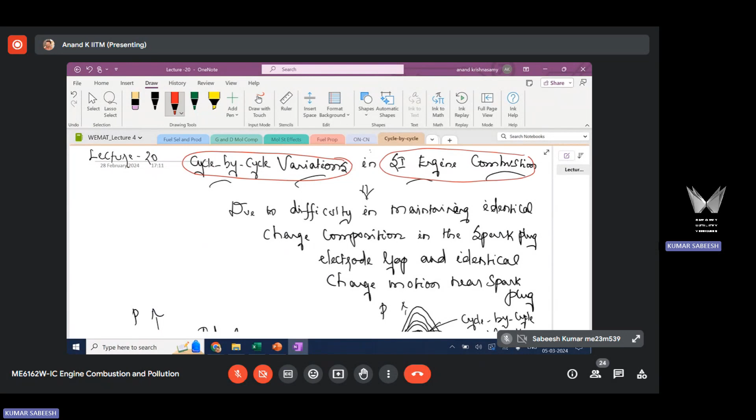What I mean by cycle combustion variation is, if you look at this pressure crank angle diagram, I have given two diagrams. One on the left is an ideal pressure crank angle diagram, ideal from the perspective of no cycle by cycle variation. You see only one profile. This pressure profile is drawn for n number of cycles. By cycle here I mean one engine operating cycle.

In a 4-stroke engine, one operating cycle includes 4 strokes. What are the processes involved? Suction, compression, power and expansion stroke, and then exhaust. So there is intake, compression, followed by expansion, then exhaust. Everything put together is one operating cycle for a 4-stroke engine.

So the engine executes n number of operating cycles. What decides the number of cycles in a given time t? RPM, sir — engine RPM. Engine running speed decides the number of cycles executed in a given time. When the engine runs at high RPM, you execute more cycles per unit time.

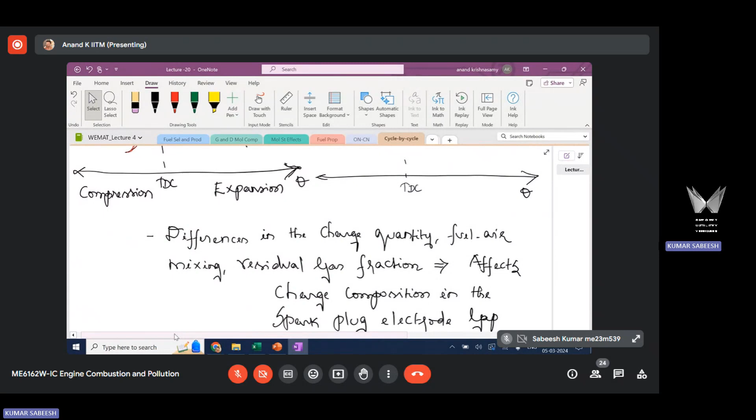As compared to CI engine. In CI engine, it's not a flame propagation based combustion event - we will discuss this in the next topic. Since it is not flame propagation based, you don't have this problem.

The differences in charge quantity, fuel air mixing, and residual gas fraction affect the composition of the charge in the spark plug electrode gap - this is the primary reason. Second, fluid motion near the spark plug also affects heat loss, and thereby the flame development time varies from one cycle to another.

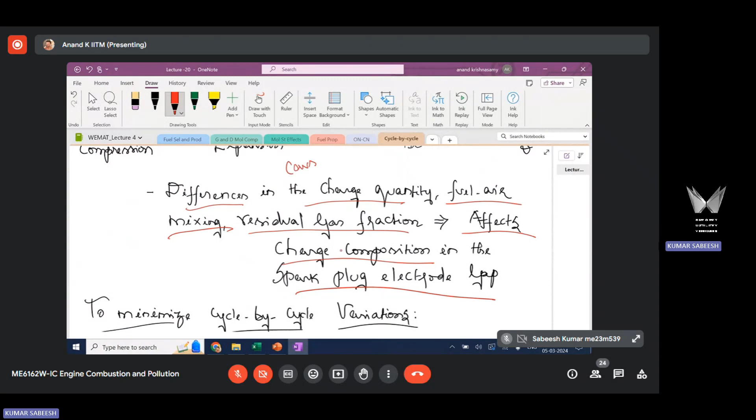Exactly, so this is one of the most important effects - there will be power loss. Large cycle by cycle variation leads to power loss in SI engine. This is one of the detrimental effects on the SI engine due to cycle by cycle variation. So you will have a power loss, as you can see from the pressure profile.

So you see the slope. This cycle is a fast burn cycle - you see that the slope is very steep, this cycle burns quickly, it's a fast burn cycle. Now look at this cycle's slope - it's a slow burn, right? The slope is flat, it's a slow burn cycle. So you have a large variation in the profile - some cycles are fast burn, some are slow burn.

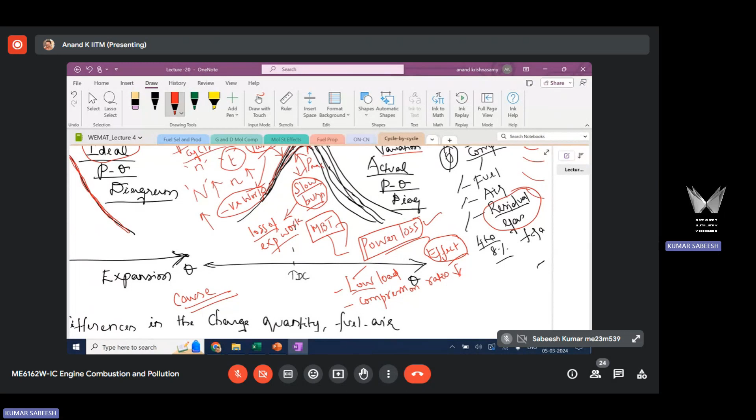Also when the compression ratio is less, at low load and low compression ratio, the cyclic variation will be very high. Because at low load, there will be dilution of the fresh charge due to reverse flow of exhaust gas. If you recollect the phenomena happening during valve overlap period at low load or part load condition, there will be reverse flow of exhaust gas into the intake system, diluting the fresh charge. Any dilution of the fresh charge increases the residual gas fraction, and higher residual gas fraction leads to composition variation at the spark plug location. So at low load, the variability is high because the dilution is very high at this condition.

Compression ratio also affects residual gas fraction, as we already discussed. Higher compression leads to higher expansion and less residual gas. But with lower compression, the opposite effect occurs - you will have more residual gas, thereby causing larger cyclic by cycle combustion variation. So this effect is more prominent at low load and low compression ratio.

Now what is the solution for this? How do we address this? This cannot be avoided - you cannot completely eliminate cyclic variation. This is unavoidable. But what we can do is minimize this and try to approach the ideal case. What should we do to minimize this?

So increase the mixture - inject a little more fuel, make it richer a bit, to create a high temperature condition.

Higher inertia - inertia of the mechanical system. How does that help? It will reduce the variations, sir, because of combustion. I'm trying to understand why you say variation in inertia of the mechanical system reduces variability.

This has to do with the process - how the system level inertia affects this process. I think he's trying to correlate it with the speed at which the components will move. Okay, speed will definitely have some effect. Fine, anything else?

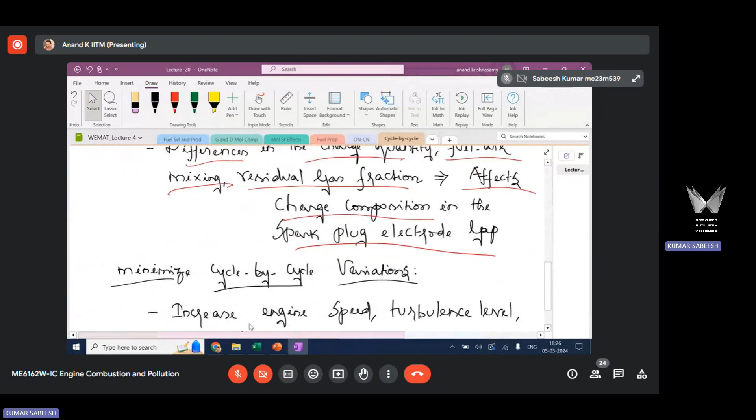Sir, instead of single spark, like going digital, DTSI, twin spark and all - spark plug location and the number of spark plugs used will play a role. So these are various countermeasures - you can go with dual spark plug. You can see in some motorcycles dual spark plugs are used. Bajaj extensively uses this. This dual spark plug will reduce the variability because the flame...

Increase the engine speed - any increase in engine speed will enhance the fuel-air mixing and flame propagation speed, and this reduces the cycle by cycle variability. Turbulence level also plays a role - increase turbulence by suitably shaping the combustion chamber. Earlier we discussed how we can create turbulence during intake and compression stroke. By suitably designing the combustion chamber, you can increase turbulence level and flame speed, which reduces the combustion variability.

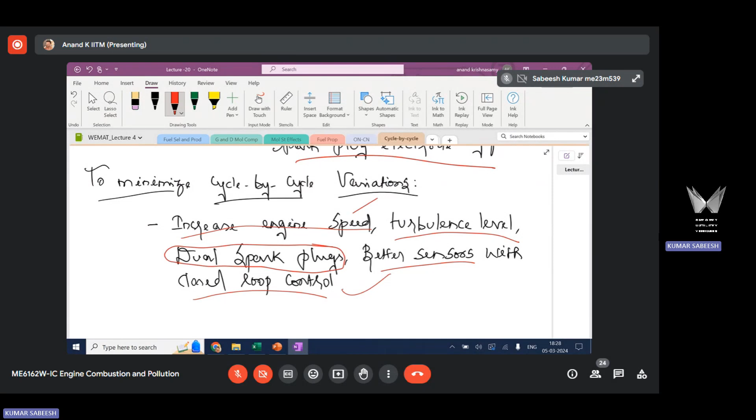If you have a better sensor with closed loop control, you can monitor the cycle-by-cycle variation, and if there is a large variation, you can send the appropriate signal to take countermeasures to minimize the power loss from the SI engine. Otherwise, there will be a large power loss because of this cyclic variation. It's unavoidable, but it can be minimized by properly monitoring with the help of an effective engine control system.

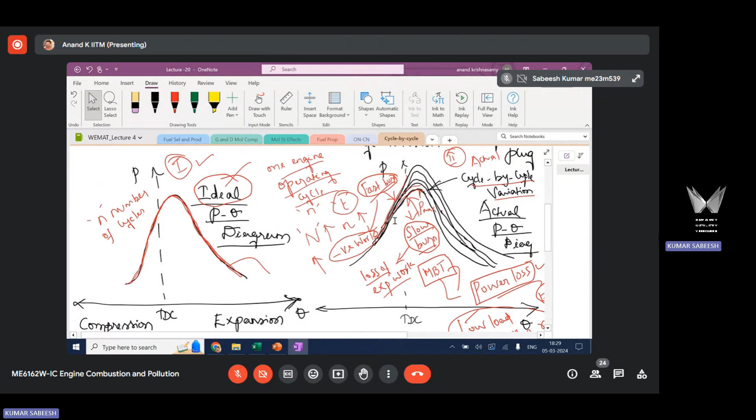Sir, I have a doubt. You had told that turbulence level in the engine is detrimental for the flame development phase, whereas it is very advantageous for flame propagation.

So if we are having cycle-to-cycle variation, and we just discussed that if we increase the turbulence level it will probably help, but you also told it will depend on both flame development and flame propagation. So once turbulence level is increased, flame development will have a detrimental effect on that. So how is it going to help? How is the net gain?

You recollect whatever I said earlier about engine parameter optimization - you always have a trade-off. There will be a positive effect, there will be a negative effect. When I say increase or decrease, take it in the sense that it should be optimal, not too low, not too high. Too high will lead to power loss also due to heat loss - very high turbulence level will considerably increase the heat loss, and there will be associated power loss. That is a different phenomenon from what we are discussing here. But in terms of the effect of turbulence, there are positive effects and negative effects.

What is the positive effect? It will help create uniform fuel-air mixing, and it will help enhance the flame propagation speed. So the variability in the second stage will be considerably reduced, and it is dependent on the variability in the flame development time. Because of higher turbulence, any change in turbulence will affect the heat loss, so you need to ensure the heat loss is not too high because of the turbulence.

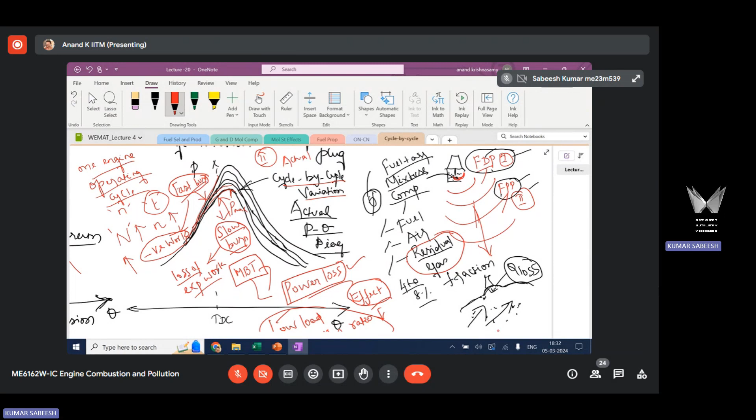Sir, I have one doubt. If we increase the amount of charge, amount of spark - generally it will go towards a fast burning process, right sir? Amount of spark in the sense, what do you mean by amount of spark? Like, we are giving spark energy, so if we increase that energy - talking about spark intensity. Yeah, correct sir. So spark intensity, then it will go towards a fast burning process?

No, spark intensity has nothing to do with burn rate. The spark is discharged only in nanoseconds.

I've given some typical numbers. At the time of spark discharge, it's a few nanoseconds - that is the time scale. So spark discharge is done only at that nanosecond time scale, just to initiate the ignition. That has nothing to do with the development of flame or the time taken for forming a stable flame. You are just initiating it; that has nothing to do with burn rate.

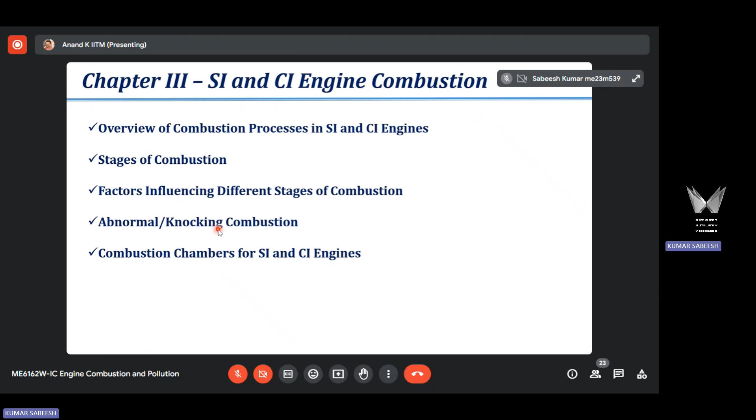Abnormal combustion is also referred to as knocking combustion. We will discuss the mechanism involved in forming this knocking combustion so that we can avoid it. Understanding the principle behind knocking combustion is important from the perspective of avoiding it in SI engines. We are going to discuss the mechanism involved, the effects of knocking combustion, and what factors we can utilize to avoid it.

As said, knocking is an undesirable phenomenon. The basic principle behind abnormal or knocking combustion is self-ignition. What we want in a normal SI engine combustion is: you discharge an electric spark, initiate flame formation, the flame should be stable, this flame should move across the combustion chamber and ignite the mixture. This is the normal, smooth combustion that happens in an SI engine - unless there is self-ignition or auto-ignition.

Self-ignition is a kind of ignition that happens only in a CI engine. In a CI engine, the combustion event starts only with self-ignition because you are not using a spark plug as we do in the SI engine - ignition is not with external aid, rather it's self-ignition. That process is normal in a CI engine, but it's an abnormal process in an SI engine. We should not have self-ignition.

Once the self-ignition of the charge, fuel, or mixture happens, it leads to this knocking or abnormal combustion. So knocking combustion happens due to self-ignition of end gas. I've used the term end gas - end gas refers to the charge, and charge here refers to fuel plus air put together.

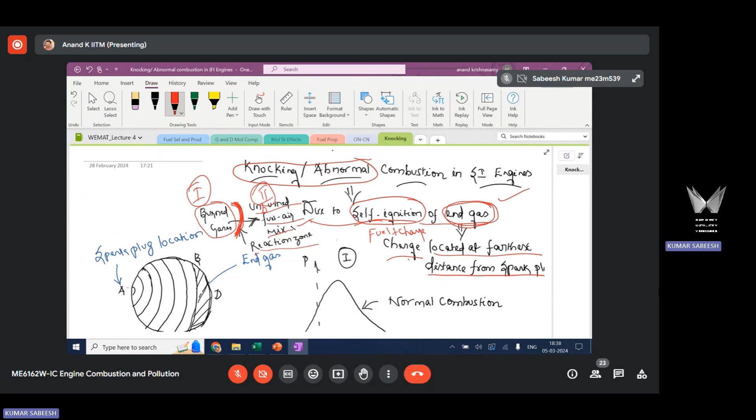A pressure profile for an engine is like a cardiograph, like an ECG, which tells you how your heart functions. How well the engine functions can be inferred by looking at the pressure profile. So you can say that the pressure profile is an ECG for the engine.

Apart from this, there's another inference. During knocking, the noise that is generated is called combustion noise. Noise in an engine is generated not only due to combustion, there are also mechanical noises due to friction and wear in various components - those are mechanical noise. Here we are talking about combustion noise generated due to very high pressure pulsations.

That is audible to the human ear - you can hear the noise. That is another inference, a physical inference. By looking at the pressure profile, you can also confirm that there is a knocking combustion.

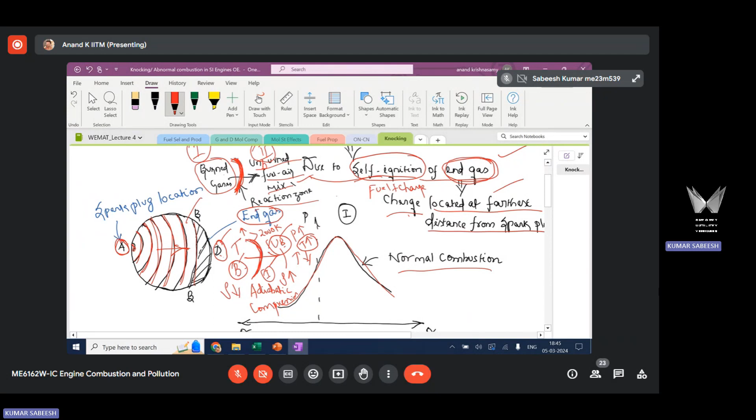Also, since pressure and temperature are increasing, there is something called pre-flame oxidation reaction, meaning there is no flame formation but some slow oxidation reactions. Chemical kinetics start to take place, and all these oxidation reactions are exothermic, meaning they also release some heat. So the unburned mixture is subjected to increasing pressure and temperature due to flame movement, and it also undergoes this pre-flame oxidation reaction which is exothermic, raising its temperature further.

So this phenomenon happens gradually, and there is a progressive increase in pressure and temperature of the unburned mixture, whether located near the flame or far away from it. Now, with all this mechanism, if the unburned mixture's pressure and temperature does not rise to the self-ignition temperature — with a given proportion of fuel and air there is a self-ignition — we call it the ignitable range.

So if the unburned mixture does not rise to its self-ignition temperature or ignitable range, the mixture will not self-ignite; the flame will come and consume that mixture. Especially the end gas mixture, located farther away, takes more time for the flame to reach compared to other regions, and this mixture is subjected to progressive increase in pressure and temperature as just discussed. So in a normal combustion event, the flame generated at A propagates across the combustion chamber, reaches D where the end gas is located, and the end gas is also consumed by the flame.

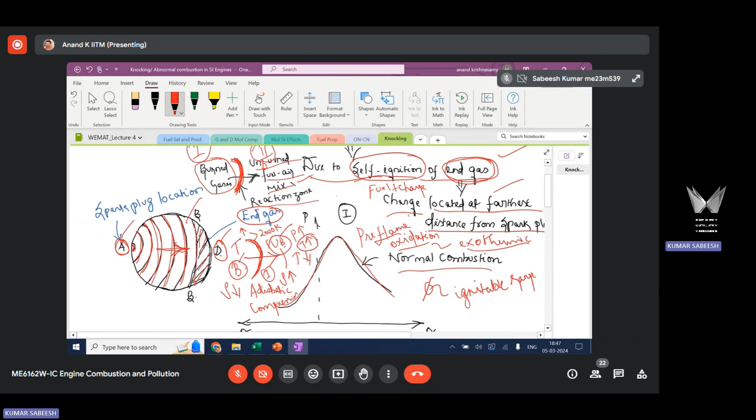Because the end gas does not rise to its self-ignition temperature or ignitable range with all the effects discussed so far. Now look at case 2. Again, A is the spark plug location, B is the location for end gas. In this case, when the flame propagates across the combustion chamber and reaches B dash, the charge ahead of it, indicated as C dash, has already reached its self-ignition temperature. Once it reaches self-ignition temperature, the flame can move only from B dash to C dash; it cannot move beyond C dash, because this mixture, having reached self-ignition temperature, will self-ignite and form another flame in the opposite direction.

Another flame starts to form in an opposite direction. There is a main flame front, and another flame front moving in the opposite direction because of self-ignition of this mixture. These two flames collide and result in pressure pulsations, as evident from the pressure profile.

This self-ignition of the mixture is like almost instantaneous heat release, thermal energy release. There is a large thermal energy release in no time, and because of this, locally you will have a very high pressure, almost 3 to 4 times higher than the average pressure.

Suppose the average pressure in the cylinder is 50 bar. In the region where self-ignition is happening, the local pressure is around 150 to 200 bar. 3 to 4 times higher pressure will be generated locally, momentarily, because of the self-ignition, since there is a large thermal energy release in no time.

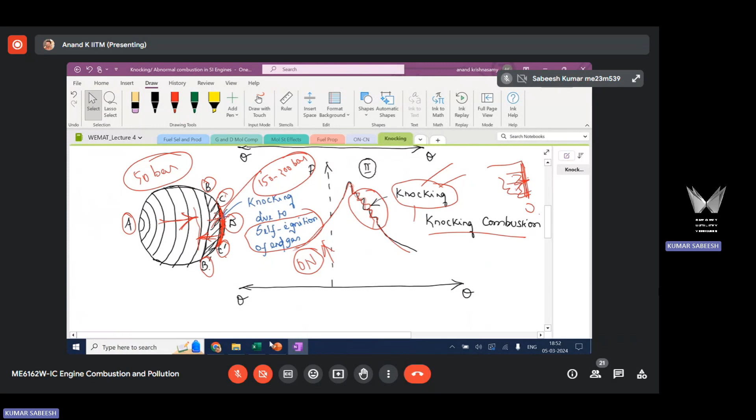Thank you, sir. Thank you, sir. Thanks a lot, sir. Hello, sir.